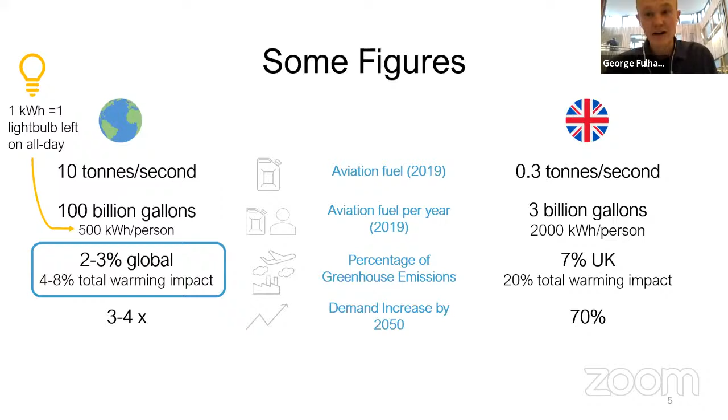Now, as we consider every industry around starting to decarbonize the electricity grid, decarbonize road and rail, then this fraction is only going to grow. And then if we couple that with increased demand for aviation by 2050, we could be as much as 3 to 4 times higher by 2050. This 2 to 3% value is only going to grow and is going to become increasingly pressing as something to tackle. So where does all the jet fuel we use go?

So numbers are available for the UK, which we can use to give a breakdown of how we consume jet fuel. We use about 15% of our jet fuel to do short haul, 22% to do medium haul, and 57% to do long haul. So what do these 3 things mean? On a map, short haul is a flight less than around 2 hours. So this is around London to the south of France, for example.

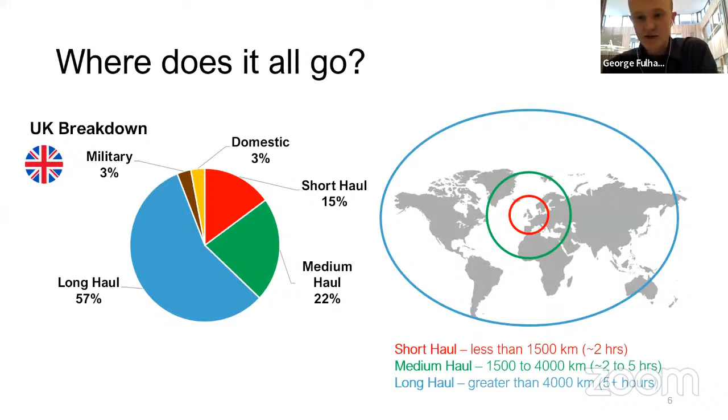You then got medium haul. So this would be London to Istanbul. And then you've got long haul, which is anything greater. So this is anywhere from London to New York, around 7 hours, to the mega long haul London to Singapore stuff, for example.

So how does aviation actually cause warming? As we've alluded to earlier, CO2 is only part of the picture. We're all happy with the idea that CO2 is going to be produced by burning fuel. However, we will also form water when we burn fuel. And this can lead to contrails, which are the clouds we see coming out the back of planes. This is where water effectively condenses and can form clouds which can last for anywhere from hours to days, potentially, depending on where they're released on the Earth and at what time of day. Now, the effect of both of these is to effectively reflect heat back to Earth and cause a warming effect, to put it simply.

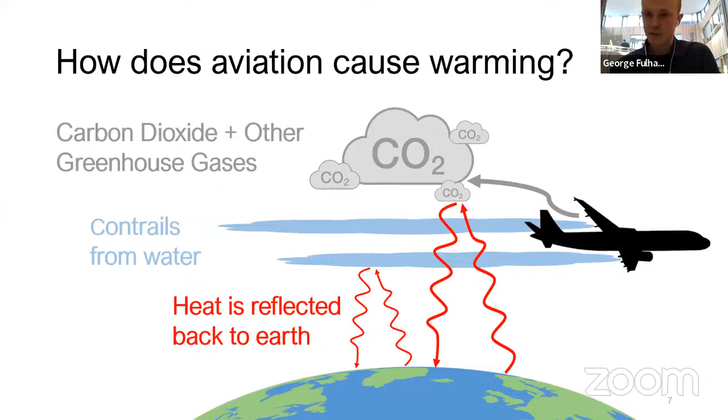So the key things to take away from this introduction are that green aviation is really going to need to tackle this long haul travel, because about 60% of the jet fuel we use in the UK is for traveling long haul. So that is the bulk of where we really need to direct our efforts. And in considering how we can decarbonize aviation and achieve sustainable green aviation, considering greenhouse gases is only really part of the picture. We need to consider both greenhouse gases and contrails.

So how can we go about achieving green aviation? Some of the options people put forward are we can change our habits. We can fly less and use trains more. And this seems like a very sensible idea for doing hops domestically or going across the channel potentially. We can legislate, so we can try and tax flights, because clearly a state of affairs now where I could fly to Rome for £20, but it costs me £60 to go to Manchester on the train, is not a sustainable state of affairs, and we should certainly look at addressing that.

And then we can try and improve efficiency of aircraft, so we can try and make them burn fuel more efficiently. However, these 3 things are never going to be enough to actually get us to net zero. Changing habits. We looked at that graph before, which showed that we use of order 20% of our jet fuel to fly short haul. If we consider what we can do potentially with rail around Europe, we reckon you could maybe reduce fuel usage by about 25% with shifting to trains.

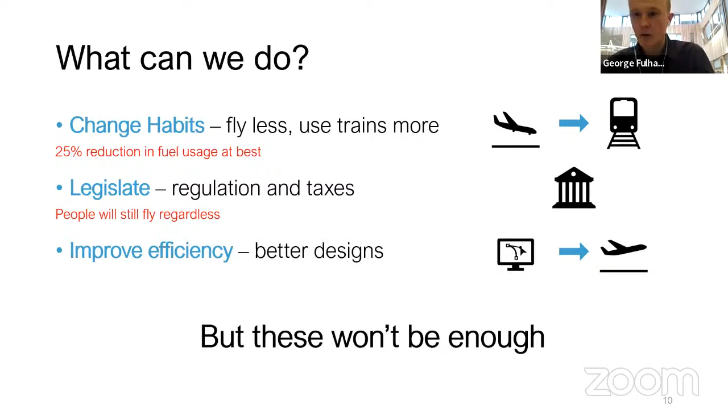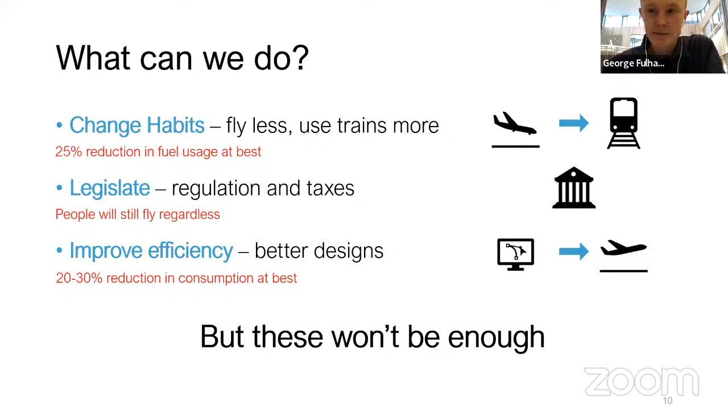Legislation. People are still going to fly regardless. There will always be people, regardless of how prohibitive we make the expenses, who are still going to want to fly to Australia and do these mega long haul things, which planes are unfortunately great at doing. Improving efficiency. We can try and make planes more efficient, but again, this is at best going to be a 20–30% reduction in fuel consumption. So realistically, green aviation is going to need alternative ways of fueling aviation. Liquid hydrogen is one that gets talked about a lot. Alternatively, we could maybe use batteries.

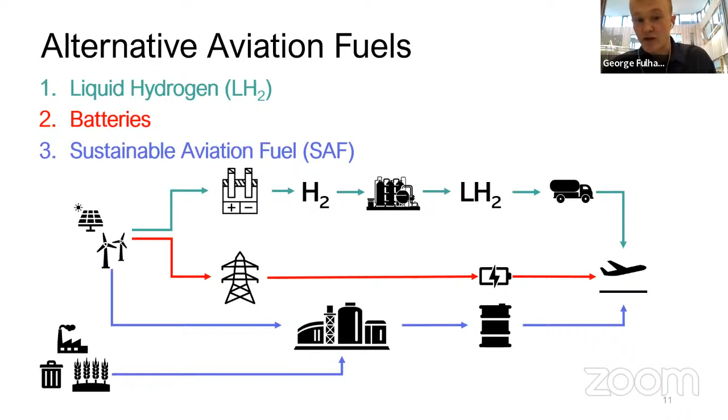Or we could do sustainable aviation fuel, also known as SAF. This is effectively stuff that looks like kerosene, but we make it in a way that's not reliant on fossil fuels. So some terminology to give us grounding when people talk about fuel production: there's green production, defined as anything made from renewables, whether from renewable crops or renewable energy like solar or wind.

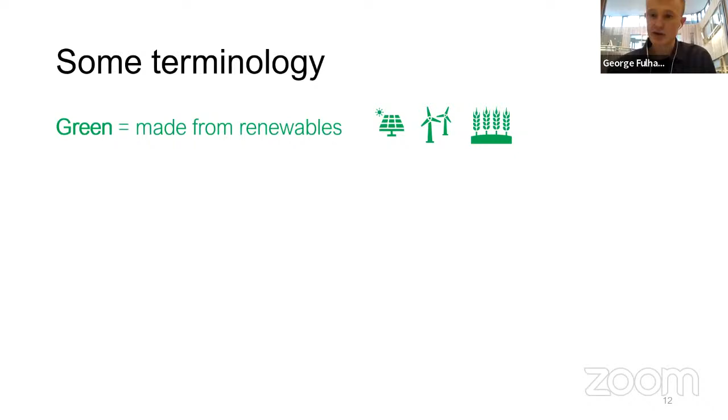We've then got the blue route, which uses fossil fuels. However, we're theoretically capturing the carbon en route, but we need to be careful to ensure this carbon capture is happening properly and is actually being stored securely. And then we've got grey, which is old-fashioned fossil fuels, dirty, releasing CO2 without any attempt at capture.

So the real thing to ground ourselves in when considering different fuels is there's a fundamental trade-off between how easy they are to make and how easy they are to actually use on a plane.

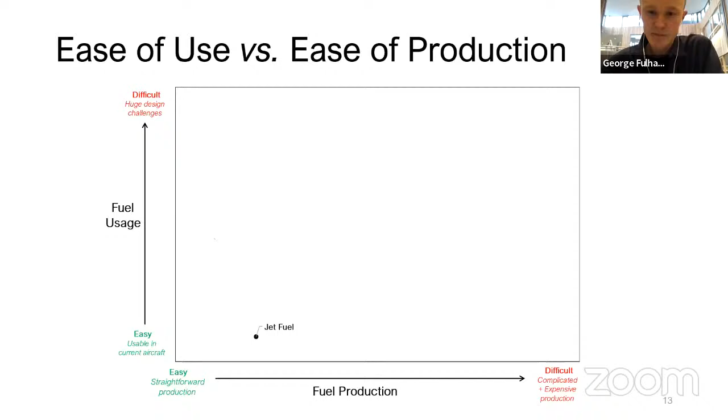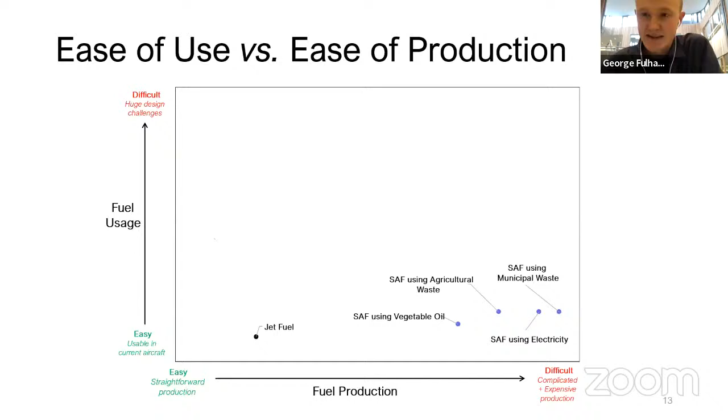We've then got sustainable aviation fuels, or SAFs, which, as we'll touch on later, can be made via a variety of different routes, all of which are really quite challenging. However, they end up making something that looks quite a lot like kerosene, so they're quite easy to use on current planes. We've then got our hydrogen routes.

These are quite challenging to make, and they provide substantial design challenges for aircraft. We're going to need brand new aircraft to handle these things. Liquid hydrogen is at minus 250 degrees, so we need insulation, we need really fancy tanks. There's a lot of design challenges going on here.

We've then got batteries, which are pretty difficult to make, but not super hard. I mean, we kind of know how to make batteries. However, using them on planes requires electric aircraft, so this is, again, quite substantial design challenges.

And then we've got alcohol and vegetable oils, other ones that people talk about. Anyone who uses a car and is familiar with the E10 transition is aware that ethanol, which is obviously an alcohol, can be used within fuels. However, there are going to be issues with using alcohols on planes—it's not a simple matter of dropping it in at 100% and using alcohol in jets. There's going to be substantial design challenges.

And then there's vegetable oil. We can make sustainable aviation fuel from vegetable oil, and some people have asked, well, why not just use vegetable oil directly? Why not cut out all this faff to turn it into fuel? Vegetable oil is obviously really easy to make—we can crush some rapeseed and extract the oil. However, you're going to have inherent variability there, and there's a lot of design challenges with accounting for that variability in planes and getting it to burn clean. So this is not a trivial thing to do by any stretch.

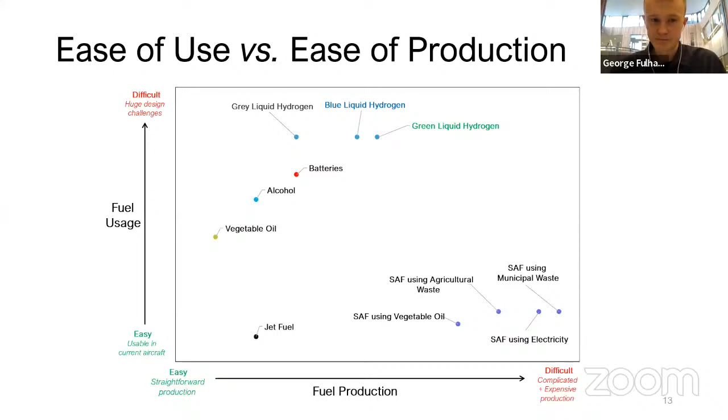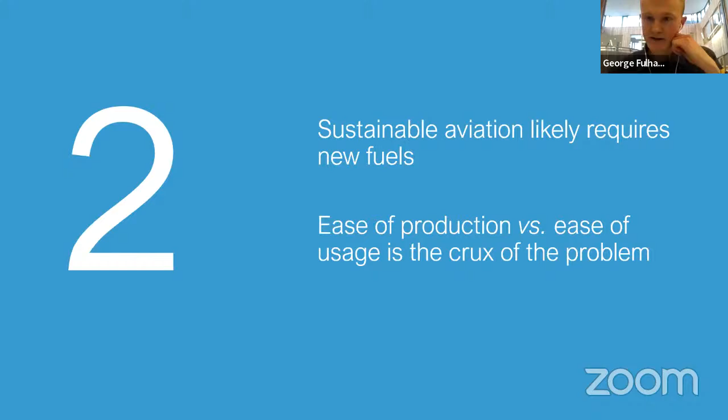So sustainable aviation is going to require new fuels, almost certainly. And in understanding different fuels, the crux of the problem is this trade-off between how easy they are to make and how easy they are to use. So I'll hand over to Paula now to give us a bit of insight on some hydrogen production.

Great, thank you, George. Okay, let's focus on hydrogen as an alternative fuel, as one of our options. Hydrogen is a fantastic molecule that we have available. It is one of the most investigated molecules in the world. It's the simplest element that we learn about in our chemistry class, and is the most abundant element in the universe.

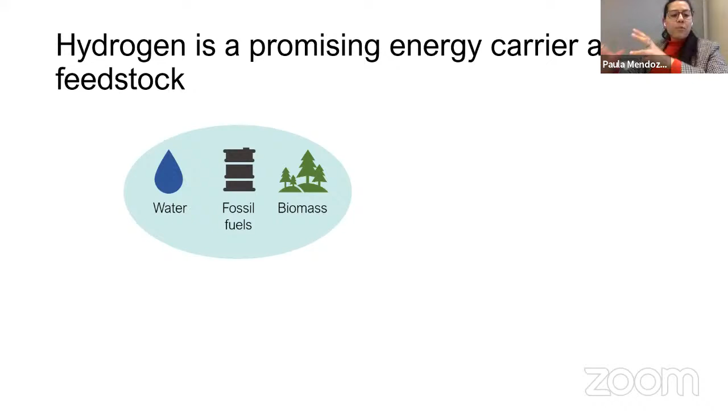So when we say that hydrogen is great, we're saying that it's a promising energy carrier and feedstock. What we mean by that is we're referring to hydrogen's ability to transport energy from one place to another, from one form to another. Hydrogen we can make from water, from fossil fuels, or from biomass.

And once we have made it, which is a complex process, once it is made, we can actually use it in a lot of parts of the energy sector. So it can do a lot of things for us because of this high energy content per unit mass that hydrogen has. Hydrogen is the one fuel that we have that has the highest energy content per mass.

And it's about 3 times that of conventional fuel, or of gasoline or kerosene that we use. So for context, let's say the sun is mostly made out of hydrogen gas, and when this hydrogen gas goes through fusion, that's how the sun releases this huge amount of energy, because of this awesome property that hydrogen has.

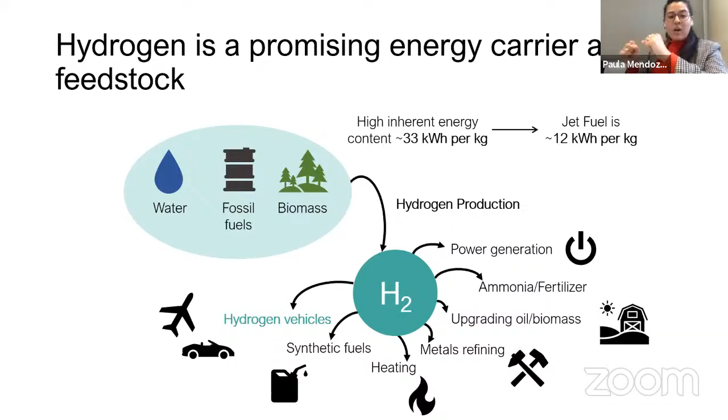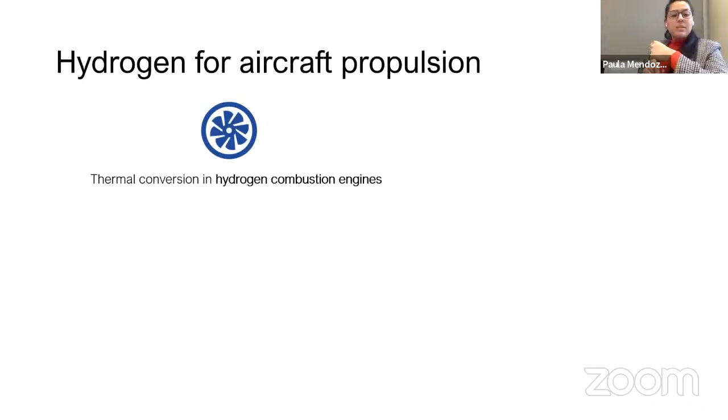So hydrogen we can use on an airplane for propulsion in 2 different ways. We can either use it via thermal conversion in a hydrogen combustion engine, or we can do it via electrochemical conversion in fuel cells.

Sorry, my computer is doing a weird thing. Great.

Both of these technologies are going to require a new propulsion system based on hydrogen. And this is going to require redesigning our airplanes. It is also going to translate into reconfiguring our airports and rethinking how our distribution networks operate.

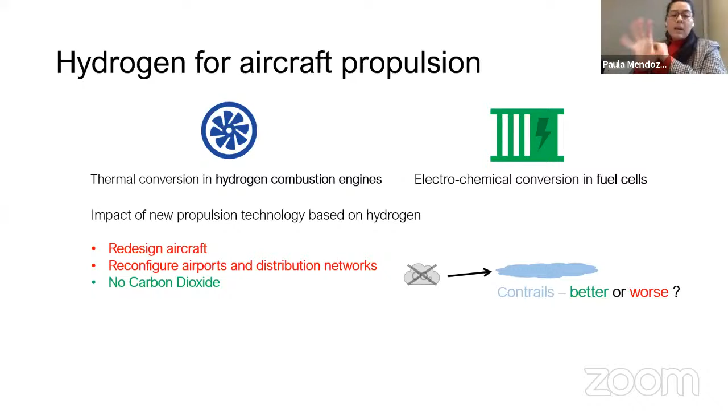However, if we make this thing work, we are looking at a fuel that virtually produces no carbon dioxide, even though we still have this question about whether or not we're making emissions better or worse because of this contrail issue that George talked about. So hydrogen propulsion is going to release no carbon dioxide.

However, it is going to have a water vapor byproduct. And we still don't understand how this warming up effect is going to happen because of this water vapor.

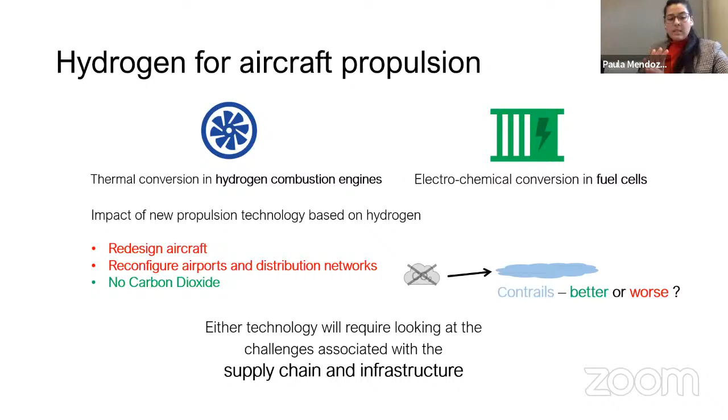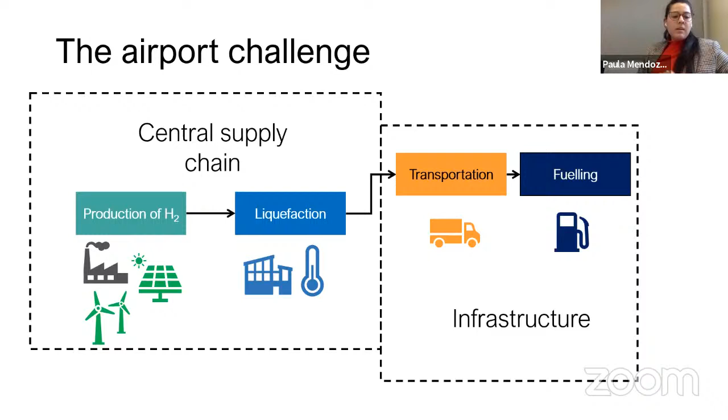If we figure out either one of these technologies, we are going to have to look at the challenges that exist in the central supply chain of this liquid hydrogen and in the infrastructure to use this liquid hydrogen. So I'll break that down for you. In the airport challenge, we're looking at two different sections: one has to deal with the production, and the other has to do with the handling of this liquid hydrogen supply. So focusing first on the production of hydrogen.

If we are going to produce green hydrogen, which we should—if we want to produce hydrogen that has the least environmental impact, produces the least emissions, and uses those resources in the most effective way—then we're looking at producing hydrogen via electrolysis. Electrolysis is the process by which we break down water molecules into hydrogen gas and oxygen. That is the one technology we have available right now that produces hydrogen in the most efficient way.

Even though this is the best option that we have, this process has very high energy consumption. So we are using a lot of energy into electrolysis, and at the same time it has a very low energy efficiency. What I mean by that is we're putting a lot of energy into producing this hydrogen gas, and it really doesn't make up for the amount of energy we end up having in hydrogen as an energy carrier.

So a lot of electricity is needed on this side, which means we also need renewable energy production at a large scale, and we need that renewable energy to be readily available so we can make sure we're producing hydrogen via electrolysis in a continuous way to support such a large supply chain. And there are a lot of emerging technologies in this area of electrolysis, but again, they're under development, not very ready. So this is the picture in production.

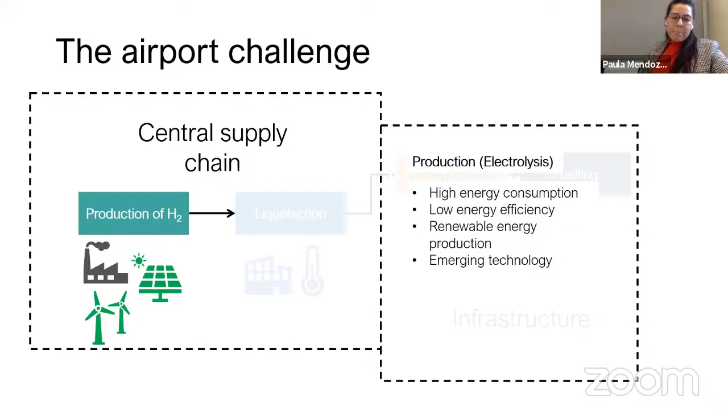Once we've produced the hydrogen gas, then we have to liquefy hydrogen. Why do we have to liquefy hydrogen? Hydrogen gas occupies a lot of space. It has a very, very low density, which means that to be able to handle this hydrogen, we need to make it occupy less space. And to do that, we need to make it into a liquid. So we need to use hydrogen in its liquid phase.

The issue is that hydrogen liquefies at negative 250 degrees Celsius, and that is very cold. On Earth, the coldest place we have is Antarctica, at minus 90 degrees Celsius, so this is a lot colder than that. Very, very cold temperatures, which means we need a lot of energy to make this happen, and very clever cycles so that this liquefaction process can happen.

And we are looking at a fuel with a cost of which 40 to 50% of that cost is associated only to this capital cost, this infrastructure cost that we're going to need to make this process.

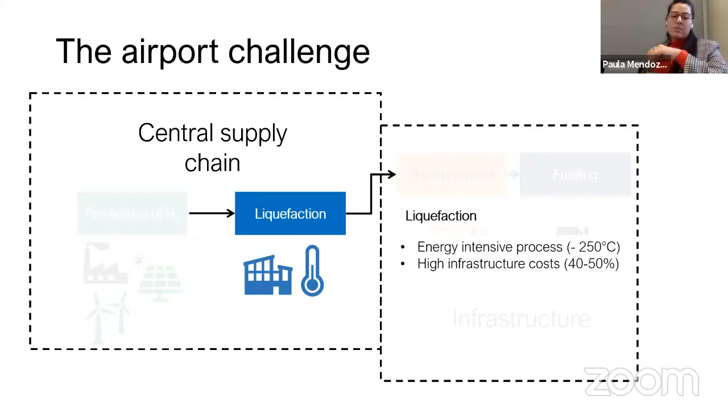So once we've liquefied the hydrogen and have it in liquid form, we have to transport it, and we need to think about how we're fueling this airplane. Because of the low temperatures we're dealing with, our entire distribution network—the pipelines, vessels, tanks, and valves—will have to be made of materials resistant to these low temperatures, and that can deal with the wear and tear of using liquid hydrogen.

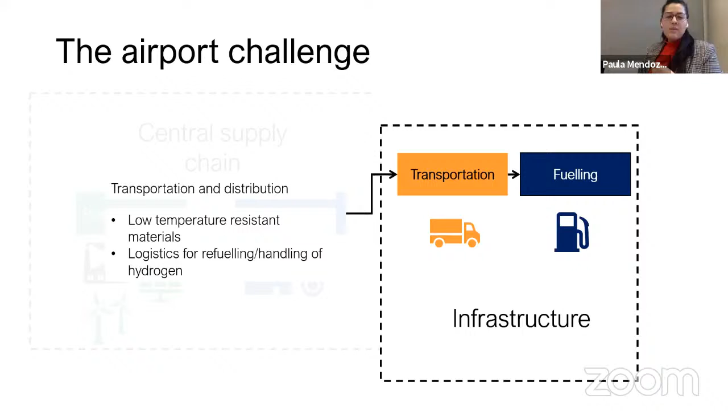We need to think logistically about how we're getting this liquid hydrogen from the liquefaction plant to tanks, if we're transporting it by road, and then to the airplane itself. So we need to rethink a lot of things. We cannot use the infrastructure we have right now because it cannot support it.

So even though hydrogen is fabulous, it's very, very difficult to make and very, very difficult to use. I want to illustrate this point by looking at a case study in Heathrow. Take a look at Heathrow International Airport in London: we're looking at about 190 million kilowatt hours in fuel used per day.

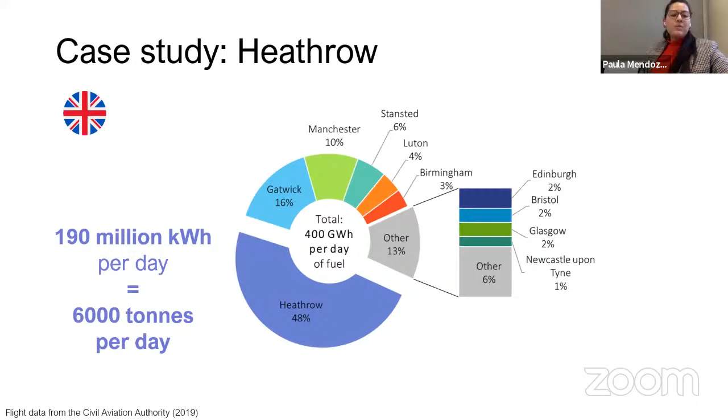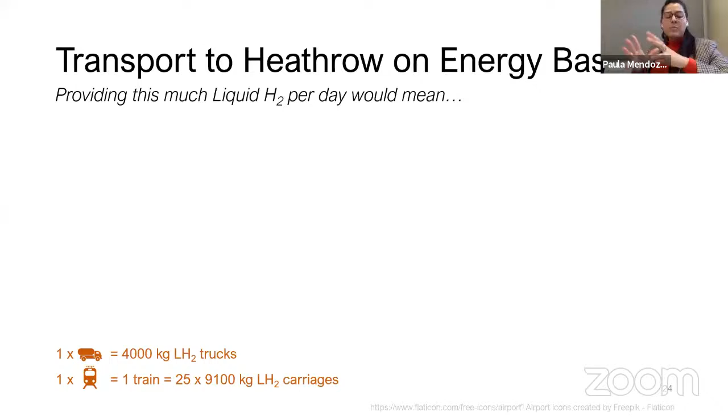A lot of energy, which translates to 6,000 tons per day of liquid hydrogen. If we're transporting this liquid hydrogen—we've made it, processed it, liquefied it—and we're looking at one truck transporting 4 tons of liquid hydrogen, or the equivalent of about 10 tons times 25 carriages in one train.

This would translate to 60 trucks of liquid hydrogen arriving at Heathrow International Airport per hour. So this is a lot of trucks, and a lot of traffic going to Heathrow.

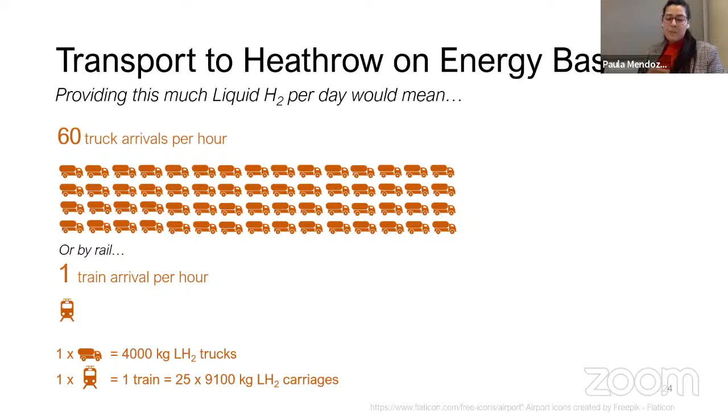So even if we figure this out and it works, there's still the question of whether we're really reducing emissions, because we're increasing CO2 emissions coming to Heathrow if these trucks are operating conventionally. And we're making green hydrogen via electrolysis, using a very optimistic case of low energy consumption, the lowest available via this technology.

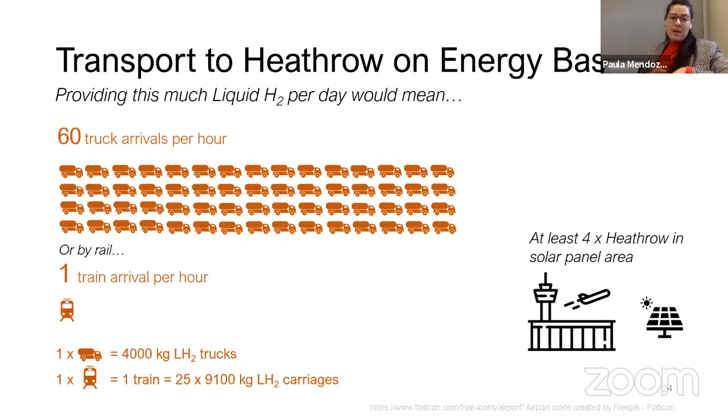And this electricity is coming from solar panels—we're looking at solar energy to make this green hydrogen. Then we need at least 4 times the area of Heathrow International Airport in solar panels only to make this happen. So this is a lot of energy, a lot of trucks arriving at Heathrow, and a lot of land dedicated only to powering these airplanes from Heathrow.

So in context, this is a lot that we're talking about, and we're not ready to actually supply this liquid hydrogen in this way. It's very difficult. The main takeaways with liquid hydrogen are that it could be fabulous, but it's very difficult to make. We require a totally new aircraft to be used, and we need to look at production and distribution of liquid hydrogen, which is very challenging. A lot of research needs to be done in this area.

So here in Cambridge, we're looking at hydrogen research focusing precisely on this production and distribution of liquid hydrogen. How can we make this more energy efficient and in the most environmentally conscious way, and look at other ways of making hydrogen that aren't via electrolysis, to see what happens if we totally rethink the way in which we're producing this hydrogen gas.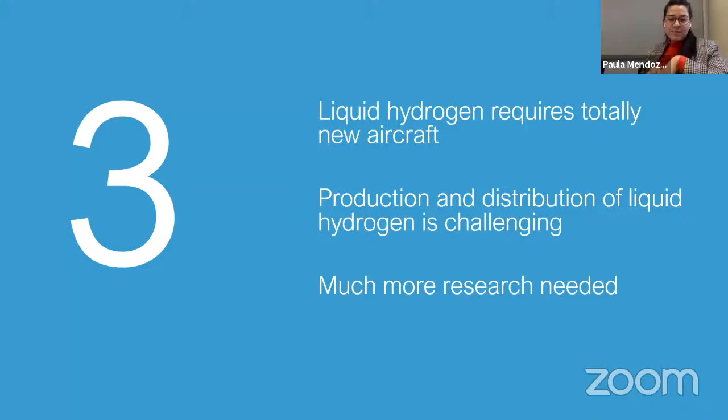Thanks, Paula. So now let's take a look at one of the other options that gets talked about and have a look at some batteries and whether they could be used for planes.

So when we're thinking about designing a battery-powered plane, one of the most important things we have to look at is how much power we require—how much energy the batteries are able to deliver every second in order to take off and then climb. Planes are very heavy, so it takes a lot of power to lift the plane off the ground. That means we have to have sufficient power available from our batteries to get the plane off the ground.

This is needed both at the start of the flight and also potentially at the end, where if you have to abort a landing and do a go around, you need enough power available again at the end of the flight. That means you need a lot of batteries, and those batteries are very heavy.

They're so heavy that the structural strength of the plane becomes a serious limit on how many batteries we can put into the plane to provide that power and energy.

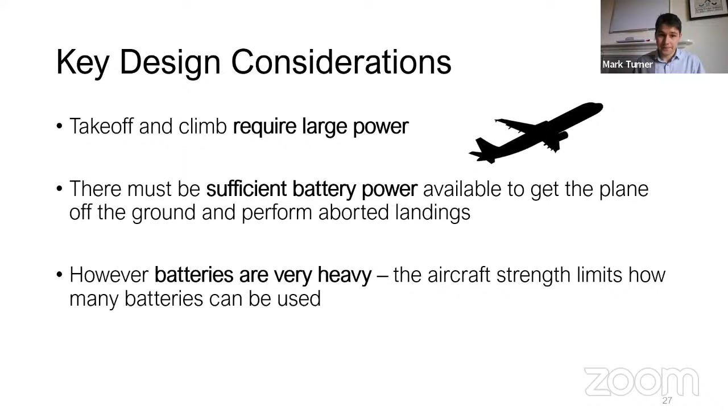So if we look at how far a battery-powered plane could go with the current technology available to us today, if we take a pessimistic case, the plane would not be able to exceed the mandatory safety reserve range that you have. So as soon as you took off, the safety regulations would effectively say you have to land. That doesn't really work very well.

If we take a more optimistic look, then you could get a bit further. But as you can see on the little map on the right-hand side, we're talking about maybe just about being able to make it from London to Calais. Really not very far at all to be useful for tackling that long-range problem we've identified as key.

So if we look towards the future, then things get a bit better. You can make it from London to Paris. But again, we're still saying that we're not getting anywhere near tackling that long range problem, which is key to decarbonisation of aviation.

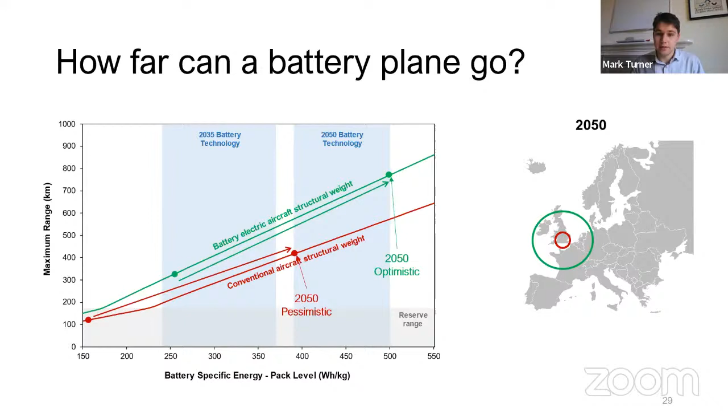Something we might think about as well is around how we charge our batteries at the airport. Charging your electric car, if you have one, takes a fair amount of time. The batteries for a plane are much bigger, and they take correspondingly a much longer time to charge as well, which leads to long turnaround times at airports, which means that you need more planes to achieve the same capacity, which is more carbon emissions, and so on and so forth.

So instead of charging the batteries on the planes, we might look at taking the batteries off the planes and loading new batteries into the planes. But normally that means you have more weight associated with the infrastructure for that loading and unloading on the planes, which makes the planes heavier, which shrinks their range. So there's a trade-off there.

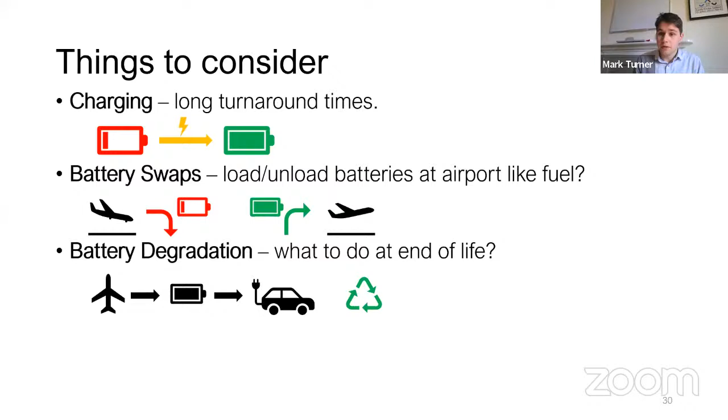Now, if you have an electric car, you will know that its range gets shorter over its lifespan, because the batteries degrade as they get used multiple times. This would happen with plane batteries too, and so the range of the plane would shrink over the lifetime of the plane. There's a serious question as to what you do with the batteries at the end, whether you could use them in a different application, such as transferring them over to cars, or whether you can do recycling, which is an area of current research and very important.

And then finally, there is a question with these batteries about how sustainably they can be produced. There's a question about mineral availability for crucial minerals like lithium and cobalt that go into these batteries, and whether there's enough of them available to produce lots of these battery-powered planes. And then, as there is with electric cars, there are questions around the ethics of where these minerals come from and how they're extracted in different places in the world.

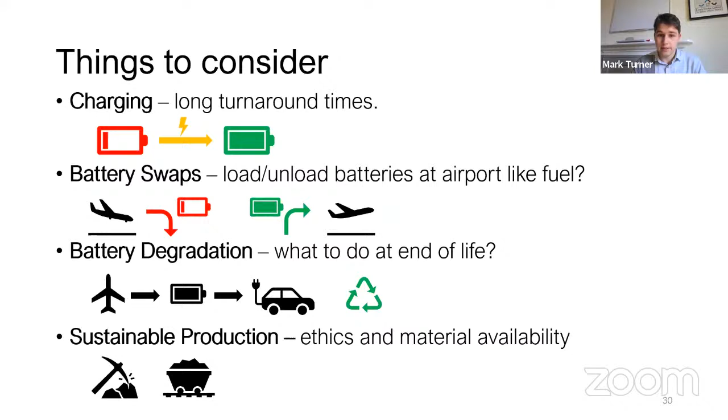So perhaps a different way of thinking about batteries that might be more promising is to look at using them in conjunction with fuel cells on airplanes. Fuel cells have very low power densities compared to batteries, so we could use the batteries to assist with that big spurt of power required at the start of the flight to get the plane off the ground. You have both the battery and the fuel cell supplying power to the motors to move the plane. And then, as we said before, one of the key aspects about battery planes is the need to have enough power at the end of the flight as well.

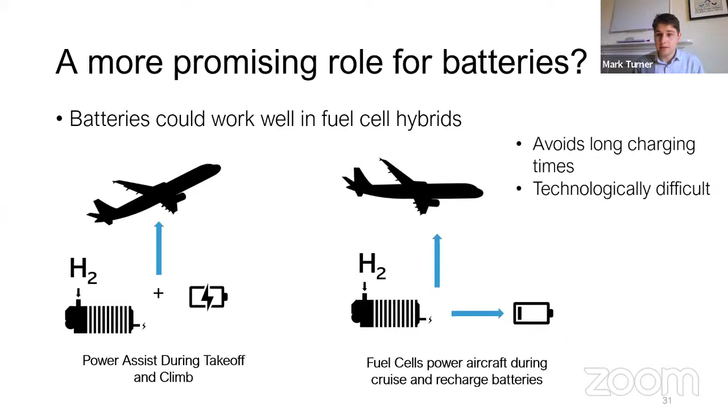You could do that by having the fuel cells provide a charge to the batteries over the period of the flight, such that when you're coming into land, you've charged up the batteries and can use that if you need to do a go around, which also helps you avoid long charging times when you're on the ground. But it's worth noting here that fuel cells would require complete aircraft redesign and a lot of technological research, as do the batteries.

So this is a big research requirement to make this a possible reality in the future. So the key points for battery planes are that there are severe range limitations that are unlikely to go away in the next 25 years. We have to be careful about the sustainability of the batteries and the minerals that are required for them. But in the future, we could see hybrids with fuel cells being promising, but that's a long way off.

And so finally, I'm just going to give an overview of some SAF. So we've gone through hydrogen and we've gone through batteries and seen that they've got promise, but they're potentially disadvantageous and difficult. And so that's motivated quite a few people to go, well, let's just try and use some kerosene, but let's try and make it without fossil fuels. And so how can we make kerosene without fossil fuels to make sustainable aviation fuel, or SAF?

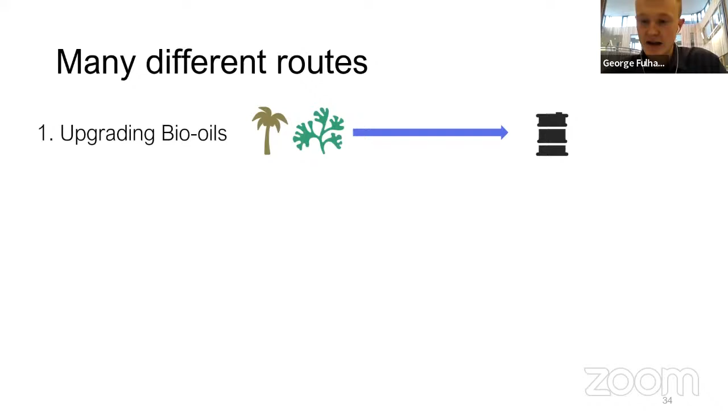So there's many different routes in which we can do this. So one is that we can take some bio oils. So we could get this from essentially algae or from oily crops, and we can then upgrade this to a jet fuel-like substance at the end.

Or we can do something called alcohol to jet. So here we can take some crops and we can turn these into alcohol, potentially by fermentation or potentially by some more exotic means. And then we can upgrade this alcohol to jet fuel. And this is something that British Airways has partnered with the company to get involved in.

And we could do something called gas to liquid, whereby we take potentially some waste municipally, so from landfill, or potentially waste from agricultural residues, and we can gasify these, which is where we effectively subject them to high temperature and pressure, such that we can basically yield a gas mixture from them. And we can then do some pretty clever chemistry with that gas mixture to then upgrade it to something that looks like kerosene jet fuel.

Or finally, we can do power to liquid, whereby we take some carbon dioxide, and we'll go through some of the ways in which we might source this carbon dioxide later. We can combine that with renewably powered electrolysis to make hydrogen, and through combining hydrogen and CO2, we can make a similar gas mixture to that which we get in the gas to liquid case, and then we can do basically the similar clever chemistry to upgrade that to jet fuel.

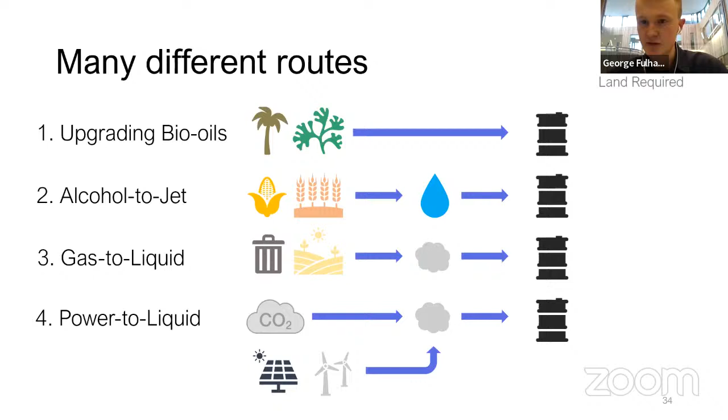So with the first three of these, where we're using crops and agriculture, then there's kind of an inherent trade-off between competing for food versus fuel, which is a long-running debate in this kind of biofuel debate. So if we think about the UK context, we've run some numbers and have a look at roughly how much land you're going to need. In the UK context, the land required for upgrading bio-oils, you would need a land area roughly about half the UK turned into oily crops.

And that's just for aviation. Half the UK with oily crops being grown. So clearly this is not very tractable as something to do. For alcohol to jet and gas to liquid, you're talking about 80% if we're using crops and agriculture. So this is even harder. And so this has led people to think about power to liquid, whereby if we're using CO2 and renewable electricity, we don't have this same kind of hefty land requirement.

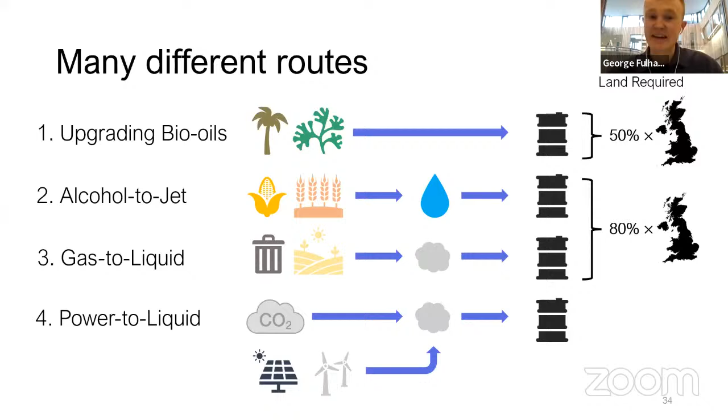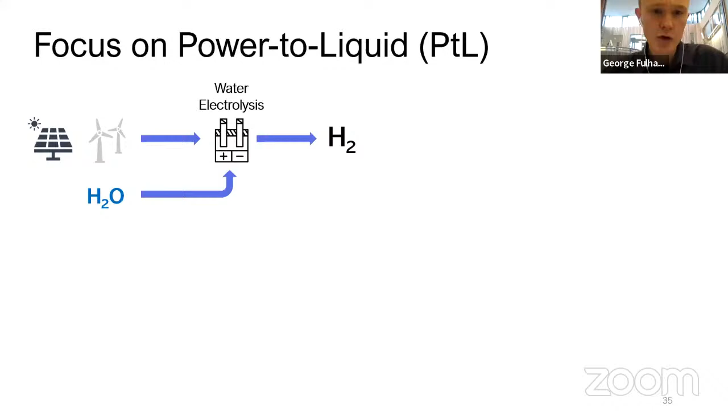And so let's do a bit of a deeper dive on how power to liquid actually works. So power to liquid, also known as PTL, we do some water electrolysis, as Paola discussed earlier, to make some hydrogen. And then we can get some CO2. Now, we can source CO2 from a number of ways.

So one is we could burn some biomass. And this is what the Drax power plant does at the moment. And then we could try and capture that CO2, so we then have a CO2 stream we can do some stuff with. Or we could go to an industrial source, like a steel mill or a cement production plant, and take some CO2 from there.

However, we've got to be really careful with the actual net zero credentials of doing this. So if I take CO2 from a cement plant and convert that into jet fuel, which is then going to be burnt, effectively all I'm doing is shifting CO2 emissions from your cement mill to the back of a plane. I'm not actually making it net zero. I'm effectively just getting almost two uses for the same emissions. So it's something worth looking at, but it's not actually going to get you straight to net zero. So we've got to be really careful with the neutrality credentials of that.

And then finally, we've got direct air capture. So this is where we literally take CO2 out of the air. And so this seems like a great idea. However, we've got to bear in mind that even though CO2 is at dangerous levels in the atmosphere and levels that we need to obviously tackle, it still is around 400 parts per million. Whereas if you're looking at industrial sources, your CO2 is going to be tens of thousands or hundreds of thousands parts per million. And so you're dealing with a much more dilute stream of CO2 in air, and therefore you need to put a lot more effort into basically getting that CO2 stream.

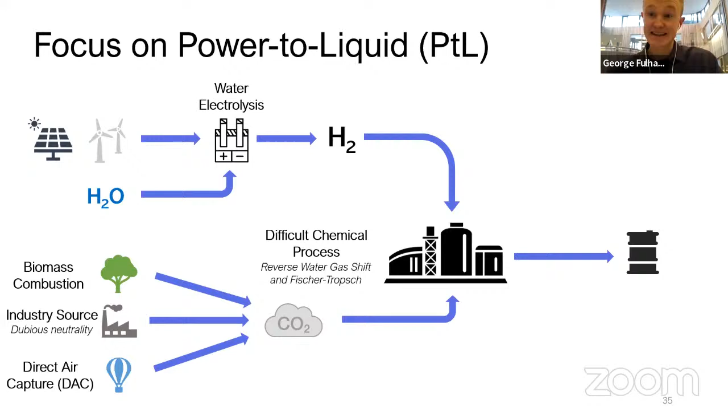But once we've got this CO2 and we've got the hydrogen we just mentioned from electrolysis, we can put these into a chemical plant and do some quite complicated chemistry. So we can do some reverse water gas shift where we basically make a gas mixture we can then do some reactions with, and then we do a process known as Fischer-Tropsch to turn that into jet fuel. Now, this doesn't have the land requirement of the ones we went over previously to the same extent. However, we're going to need a chunky amount of power.

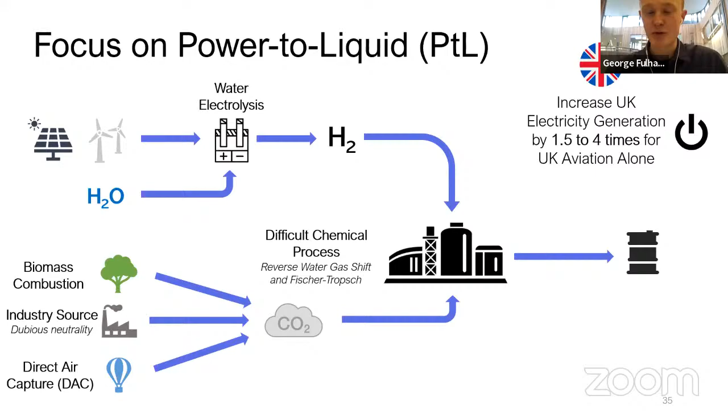So in the UK context, we reckon in a very generous case, you maybe need to increase the UK electricity generation by 1.5 times for UK aviation alone. And bear in mind that everything else is starting to electrify, so electric cars, there's going to be a huge demand on electricity there, and aviation is going to be sucking up a lot of electricity. And in the worst case, we might need to increase it by 4 times for aviation alone. So even though you don't have quite the same demand on land, although with biomass combustion you are going to get into issues with using land, you've then also got a huge issue with how much electricity this process actually requires.

So sustainable aviation fuels, or SAFs, are probably the hardest fuel we can make, but the easiest to use because they look the most like kerosene. There are many ways we can make SAFs. However, out of these, power to liquid is probably most likely to achieve net zero, but we've got to be really careful with how the carbon accounting is done on people claiming PTL can reach net zero.

So what are the key conclusions we can draw out from what we've gone through today? Any option which cannot address long-haul aviation is not really a true solution in reaching net zero aviation. And of the solutions that are proposed, there are no easy solutions, and any solution is going to require huge change at the system level and a complete rethinking ultimately of how we go about fueling and operating aviation.